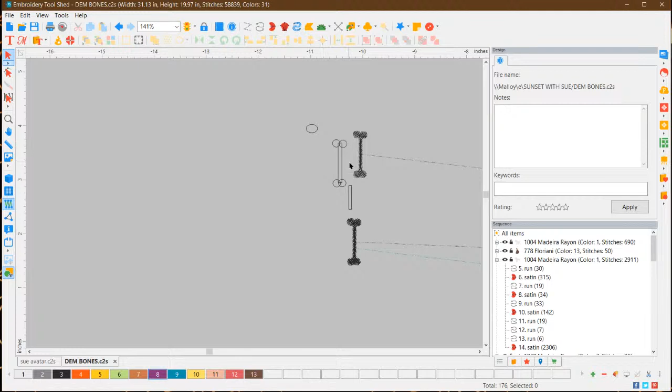And we're still talking about shapes, none of that has changed. We're still talking about shapes. And this is a pretty easy way to make bones. Now, you can make them shorter and smaller. They don't have to be perfect circles, they don't have to be anything. You could make them thicker bones. And then we could stretch out this circle a little bit. This is all that I'm doing here, so this is more of a cartoony bone.

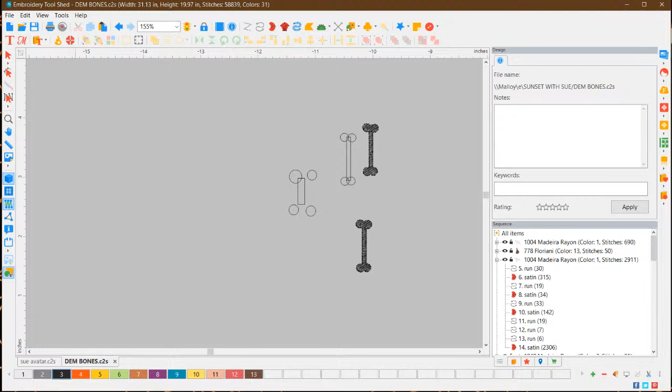So I'm going to duplicate that, so D and pull it out, maybe make it a bit smaller. I think I'll make the first one a bit smaller. And I'm just going to go ahead and place the rest. They do not have to be perfect, we do not need to have perfect bones. But this is all that I did.

Now, of course, I'm going to go in and tweak a little bit. And there, why not, cross them over, overlap them just a little bit, maybe. Yeah, this one's way too big, this is a little arm bone or something. So it's kind of cool this way.

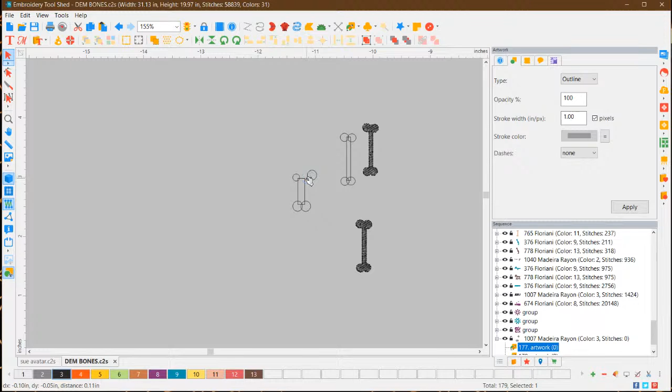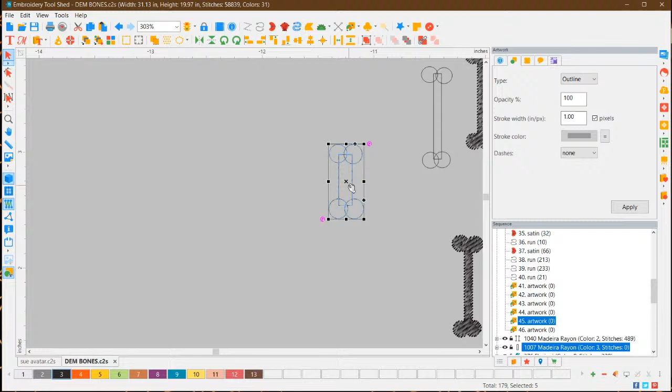Okay, remember that what we have right now is not stitches, we are working in artwork, so we want to put stitches on it. So you can either merge them with stitches or without. And in this software, we right click and we're going to go to shaping and we're going to weld everything together. And look at what we have. We have a nice bone that's completely different from this long bone. And now we can fill it with stitches, so we're going to convert those outlines to complex fill.

And if your software has it set up a little differently, that you don't do artwork when you start yours off, that's fine, just do it all in stitches, that's what we know best anyways. I do not like that, so I'm going to undo and leave it the way it was with an angle.

So bones, everyone's talking about bones. Thread bone connected to the fabric bone connected to the stabilizer bone. Very nice, David, thank you very much.

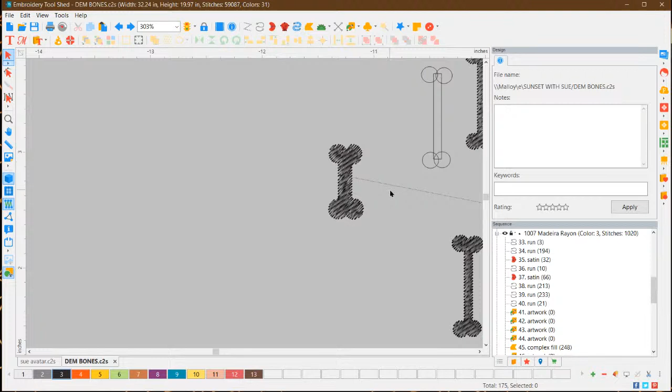That's awesome, but you can do the bones however you want, whatever size you want. You can see, there's a big difference between the thin one. This might be a leg bone, and this might be a neck bone or something. I know they don't look like that, but who cares, right?

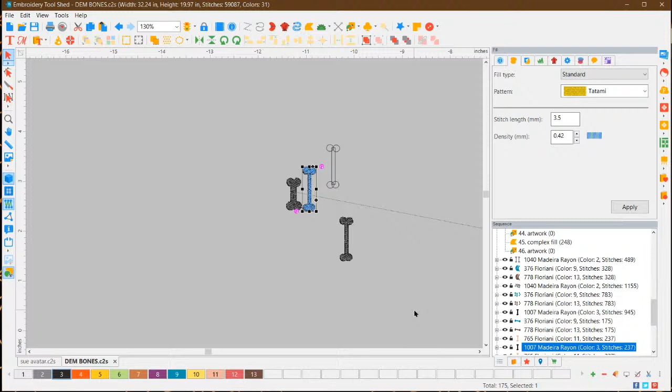So once we have a different set of bones, or one that you like to work with, I think I like this one just a little bit better. It just seems more in proportion, but that's okay. I designed this one to try something cool. So lots of things we can do with it, look at that, make your own lettering.

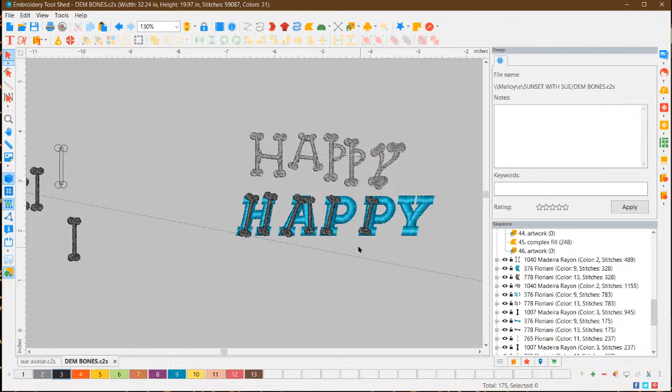And I just did this one freehand because it's easy words. So I just put them together. I made some duplicates here.

Maybe I'll try it with the smaller one. I'll put that one back. Let's try with the one I just made and see what we think. Now I can stretch this out and it doesn't look good, so I'm going to go back on that one. So we might not have enough room for it.

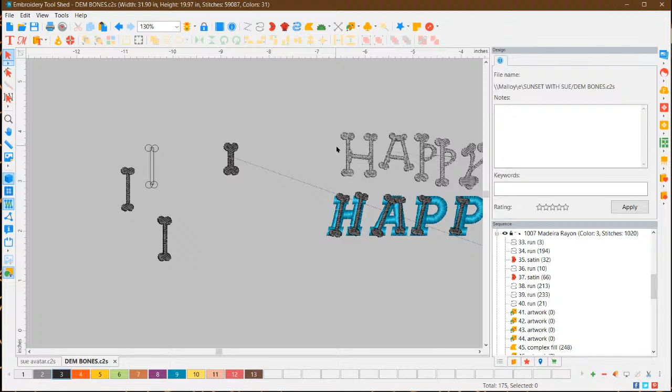So, okay, all you have to do, look, it's all these pieces. So for the H, let's do Control D for duplicate. And whoops, where's my mouse? I lost my mouse, it's hard to see. Okay, I see it. So look, the benefit to doing a duplicate is that you can bring the bone to the size that you want.

Maybe not the angle like I did, but I'm left click and holding, and I'm going to make a little bit of a smaller bone. And then what I'm going to do is copy, Control C, and Control V, and so it'll be the same way. See how I did that? That's a lot easier to me anyways than doing it any other way.

So let's copy and paste, or I guess I can just paste, and it's going to go where I took it from. And for the A, we just want to change the angle of it. And we're gonna, let's do copy, do paste.

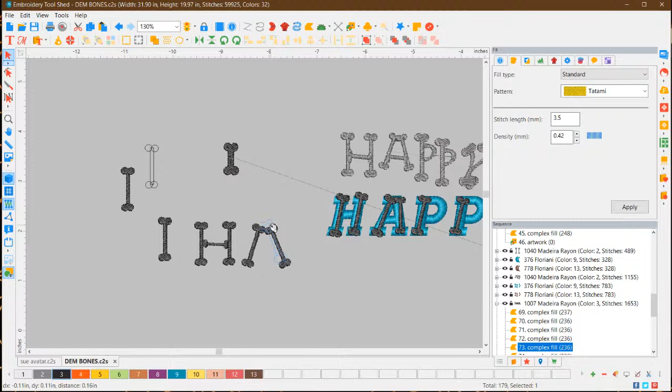So you could create your own alphabets out of letters. And it doesn't have to be perfect. That looks really good. I'm gonna take this from here.

Don't digitize extra stuff if you don't have to. This looks really good. Now that's a pretty stylish letter, and I kind of like it. So it doesn't matter that this is shorter. Look, this A is smaller and it looks pretty good.

And you know what? I just bent the bones around, and let me show you how I did the Y. It's kind of looks like it's merged. We could probably do it a bit better, but it'll still give you the idea of what I'm doing. That looks more like an X, so that's why I did it that way. But it's easy to do.

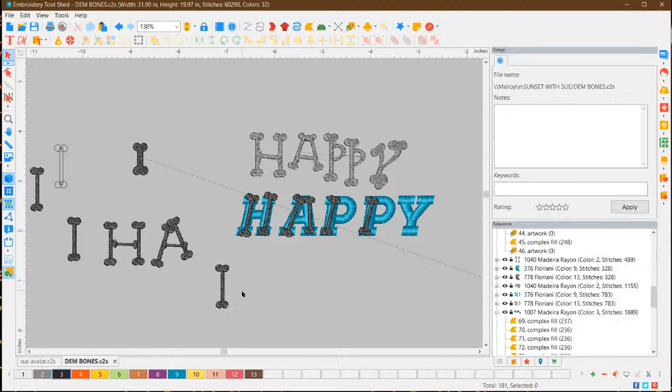Let's go to copy and paste, and there we go. And we're going to go into node mode, edit nodes, sort of thing. I'm going to zoom in so you guys can see it better.

And what we're going to do, I'm going to leave the angle there, but I'm going to add a couple of points. And this is how we're going to make the letters sort of thing, we're going to make it work. The easiest way to do it, I just put a point there and a point there, and they're curved points.

I'm going to left click and drag and create a bounding box over both. And once you do that, then you can do this. And we can play with our Bezier points here. I don't think that's right.

Let's smooth, so I can have another Bezier point. Smooth. So, I mean, that's a start. You can also move these down if you think it's like too harsh sort of thing. You can move it down like this instead of it being up here. Do you see the difference?

A little bit of playing involved here, but let's do it like this maybe. Try to get it in the middle. I don't know what this is, but you know, there we go. But see how you can do that? That was super easy, 2 points, select both of them.

Node mode is reshape. Yeah, I'm sorry, I tried to say that. Or edit. Isn't it edit nodes in some software?

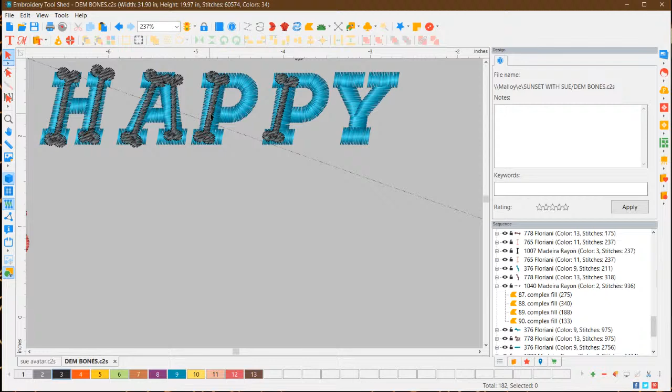Now on purpose, I made the designs a bit shorter, a bit longer, a bit moving around. It seems to work just fine, and I put another one here for the P with the curve, or you can design it yourself like I did with the O. But why not make your own bone lettering? I think this would look spectacular on just about anything, and it's one of a kind original.

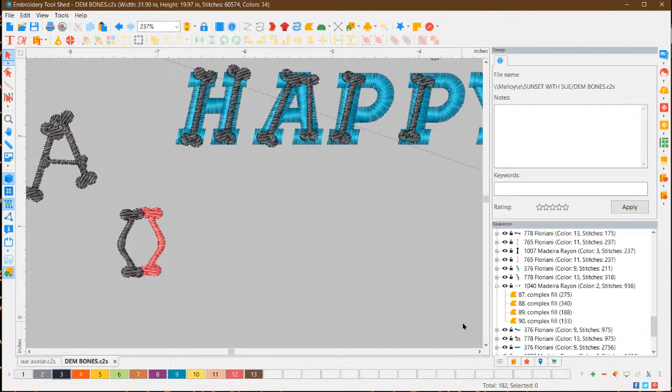You can make a bone as well, but your bone will be different from mine, so it is completely original to you. And it's actually a lot of fun. You could do duplicate and just put a whole bunch down and then move them around - that might be easy. But pick a font, pick the size of the font that works, and just lay some bones over it. Then you delete the lettering or move the lettering, and that does not look like anything because I haven't finished it yet. But that's an easy way to - remember, I'm always saying work with what you've got, and you have fonts in any software.

Let's really have some fun with this. So what I did - and again, as always, I'm not encouraging you guys to copy anyone's designs, but if you're just making something, why not use it as a template? So this is just a dog design, and it comes with Perfect Embroidery Professional, but you could use any design or shape. It just helps you figure out where to place the bones, and you don't have to be anatomically correct about it.

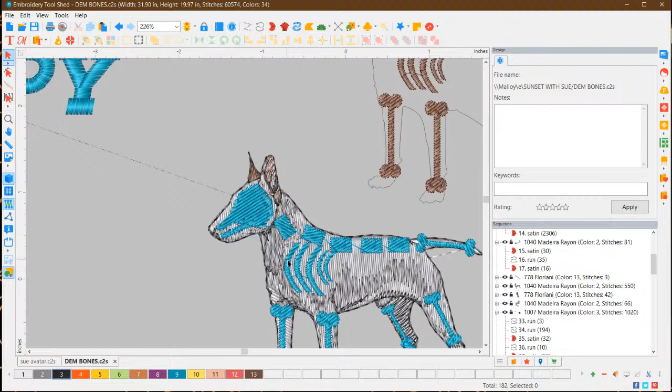Like, for example, I know that the bones of the spine do not look like that. I'm aware these are kind of funny looking ribs. I think I would actually like the ribs to be in satin stitches. But anyway, I just took a straight line and put a little bend in it. Then for the skull, depending on the size, you can get detailed about it. But look, I just made a rough outline, and that is probably not the greatest placement.

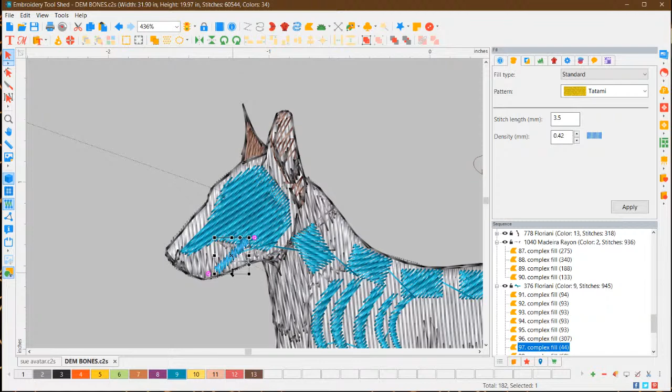You could put teeth in there too if you wanted. Make it all one piece - it doesn't have to be anything too particular, but you get the idea of it, right? You really get the idea of it. Even if you just leave it like this, you still know that it's a skeleton dog.

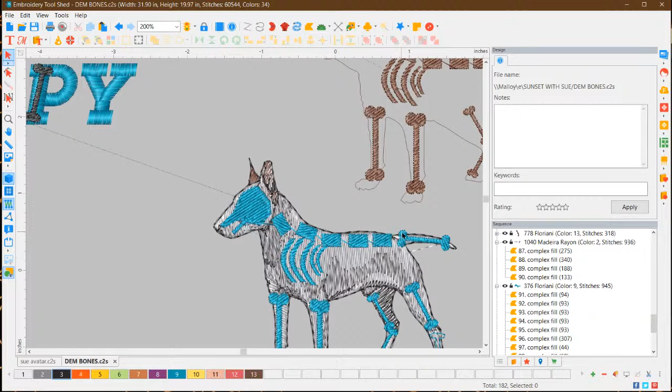Why not? So these are just rectangles, and again, you don't even have to be even remotely accurate on it. I mean, a hip bone and shoulder bones - they're different shapes, you could figure out what they look like. Probably not at this angle. That might be difficult.

Or what you can do is select the whole dog design and create an outline for it. So right click, create outline, and then move all of your pieces in. So then you don't have the background. Sam came down and she looked and she said, wow, I love that. I love it with the shading behind it.

So all you have to remember is this: the dog, the shape of the dog, and everything about it other than the bones is not your design. So you can't do something like this and then sell it, because the design still belongs to Dime. So just be aware of that.

I think this is really cute. I thought of like a kitty cat sitting there, different things. You could even do a person and make a skeleton out of something like that, and I think they look good. I would fiddle around with my skull bone. And you know what, you could even be really, really funny and do something like this.

Copy and paste, make a mess of my lines there. Why not make it a little smaller and make his ears like that? It doesn't really matter, I think it would look really cute. I'd have to resize that a little bit, but isn't that cute? Let's do another paste, because why not. It's a dog-ish, skeleton-ish, and everyone will know what the idea is. I think that's cute, it looks more like a bug right now, but I don't like the skull. I just whipped it off and then got tired of it, so fiddle around with it. But ribs don't have to be realistic.

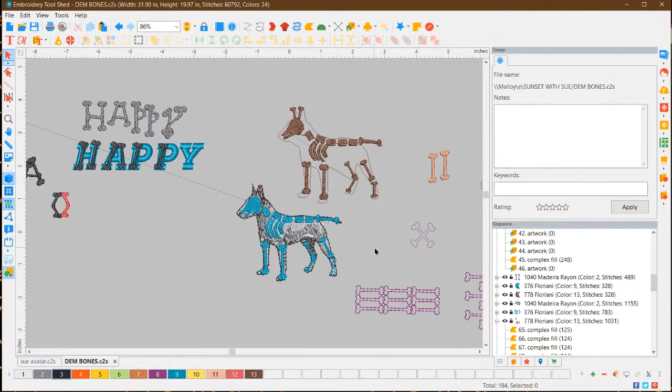So now we can do more things with bones. I had a little bit of fun playing with them as motifs, and I thought, oh yeah, of course. I'll show you that big one in a minute, because this is a classic. Why can't this be a motif for sure?

So how did I do it? I took the bones that I made, still the same bone right from the beginning, and I made a copy of it and pasted it. Then I went ahead and right-clicked, and we're going to - you could either convert to run, that's one way of doing it, or you could create an outline. That is just as easy. Now that doesn't show up very well, so let's make it a little darker.

So all I did was put an angle on it, and then I'm going to copy and paste, copy and paste, because we don't want to have to do that again. And then there we go, and that looks really good. Now my only problem is the difference between this one and this one is, first of all, jump stitches. Why? Because it does one bone and then the other. I would like it in one piece - it's going to make it stitch out even better. And that's what we want to do.

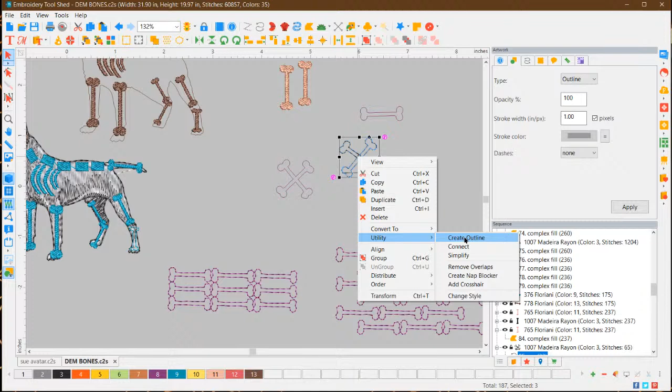So you can always create an outline. I have both selected, and it's going to create an outline, and then you see it's done. So you don't have to weld, you don't have to do anything fancy - just put your things together and design. It's another way of doing it, and I think it's really handy. Now we know we have one in and one out - it is one piece and it would stitch beautifully. So to create our motif, we have to remember our in and out points. It doesn't have to be perfectly level, you can do it a little crooked if you want.

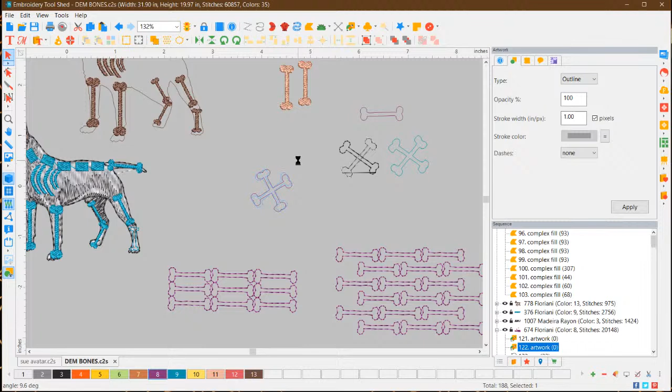I don't want it to look like a cross, but of course you can just change everything that you want to do. And I'm going to pull out a guideline here because I want to make sure.

Group or merge in PE Design 11. Group doesn't put them together, group just keeps them together. So if I were to group these two bones, they're still separate objects, but if I clicked on one, they would move together as a group.

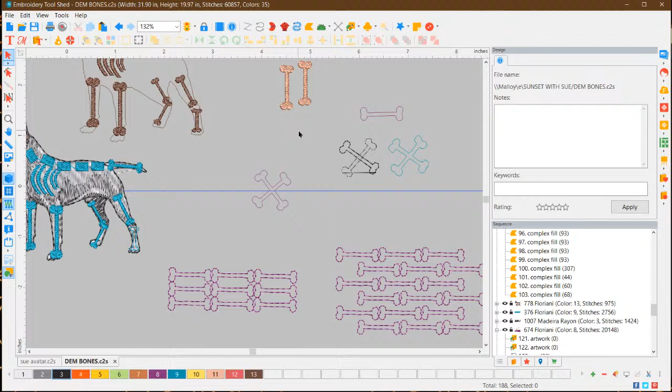So merge, yes, I'll have to look. I don't use it that detailed enough to remember offhand. But if you can't find merge, the whole idea of that exercise was that you can do outline. You can use what's available to you.

They look like Jack's the Game. Well, they're scary, scary bones. It's not Jack's the Game. Yeah, they kind of do.

So what we want to find here is our start and end points. And we want to, whoops, we don't want to do that. Although you can if you want to tweak it. Let's move in here and see where we are at. Oh, do you see what my problem is?

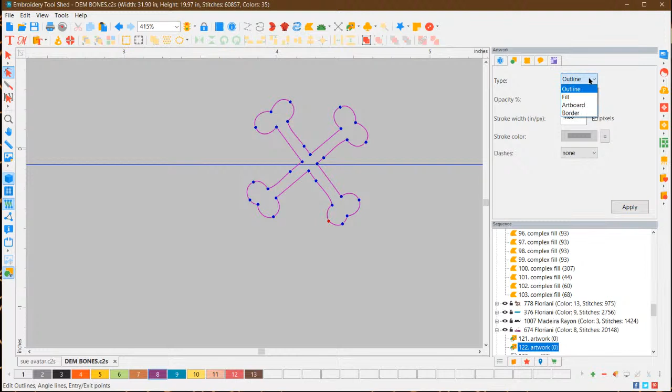Okay, so I'm looking for the start and end points. I did an outline, and you know what, there's no stitches. So what do we have to do? We have to make stitches. There's no start and stop points in an outline, in a graphic. So there you go, let's convert it to run.

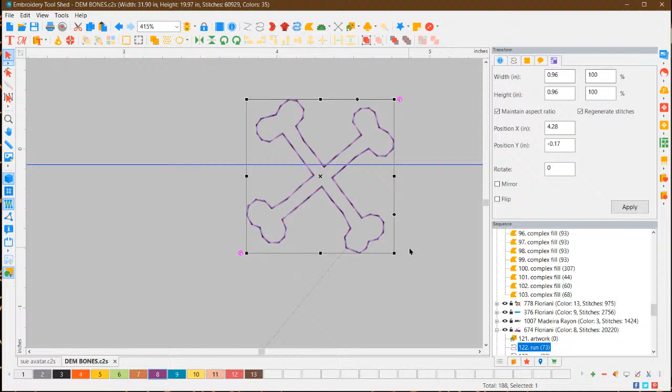There, now that's better. Now this looks a little jagged because it's pretty small, so there's not a whole lot you can do about it. Yeah, it's not even an inch by an inch. How about we make it a little bit bigger than that? Now the bigger you make it, you notice these are rounding out more. Why? Because they can get more stitch points in. And that's why you have to be careful when you make things smaller.

Now for this one, you could adjust the stitch length a little bit, but it won't make any difference. So now we can go in and change the start and stop points. So my point of all that was, if it's not working the way that you want, think about it. I totally forgot that I need to convert it. So it just will help you get

Not get frustrated. So what did I do here? Well, this is our start and our stop point. I think I'll change my mind last minute, and I'm going to put it here, and I'm going to put it here. No. How is that going to go? Let me try this and see. I like to try different things.

Need a skull on top of that. Yes, I know, but I'm going to have to figure out how to do skulls from shapes, and then we can put it together and make something super scary. I think I got it backwards here.

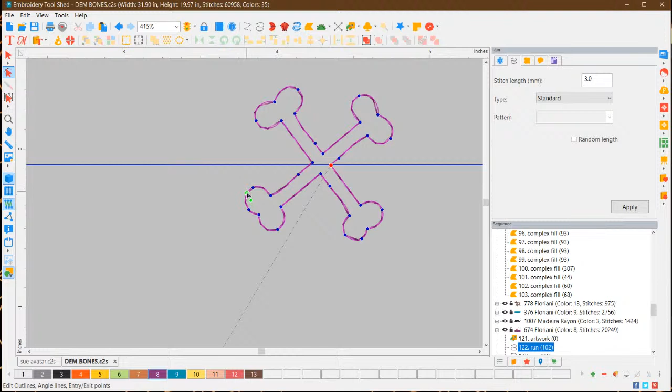Sometimes when you're making motifs, be patient and remember to figure things out. Take your time, remember what you need to do.

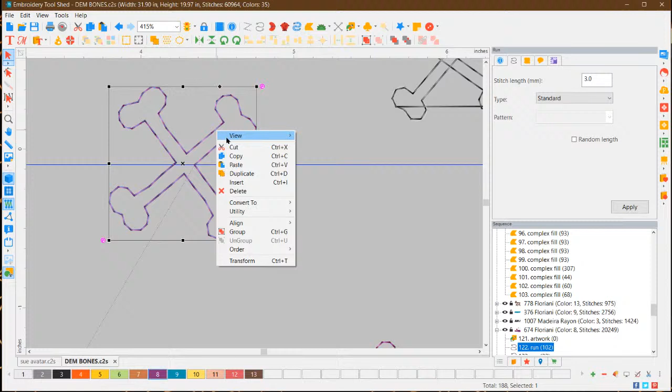So this one, if we were to, let's do it the way it is. So copy and paste. If we were to do it the way it was, you see a jump stitch pointed out there. There's my stop point, and there's my start point, and there's no jump stitch. So what do we need to do? We need to make a little bit of space in between these.

So I'm going to go back to that. Now this is my stop point, so I am going to grab right here the run path, and we could do a round swirly. We could do it like this, maybe that. I should have marked how far away it should have been, but I didn't.

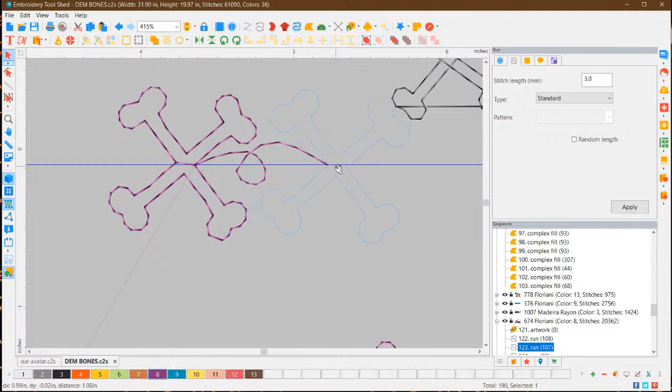Oh, we do definitely need to change that color to match our bones, which is purple, because why not? Then let's do a paste of the bones, and let's move it over here and line it up where it's going to start. And I think that's the perfect amount of space in between. I kind of like it.

You could do a line, you could do, I don't know, a smiley face. You could do anything that you wanted in between. I think the swirly is cool. Another thing you could do is move them down a little bit, and you don't have to just have one design. So again, I'm going into node mode, edit mode, and I'm just moving it around a little bit.

I don't want it to cross over too much. I'm just playing at this point. They don't have to be equal, they don't have to be anything like that. Let's move this to smooth, and then we can use our Bezier curves to get the look that I want.

Let's connect. Now, how does that look? Oh, make sure you move your stop point. That kind of looks like maybe a bee was buzzing around or something.

I don't know, maybe it needs a bat or something in the middle. Would it work to set it askew and have a stitch or two connecting the cap ends of the bones? You could do that, yep, you could do that. You don't even have to do, whoops, wrong, I need this. You could do something like this, and you could do the start and stop points right there.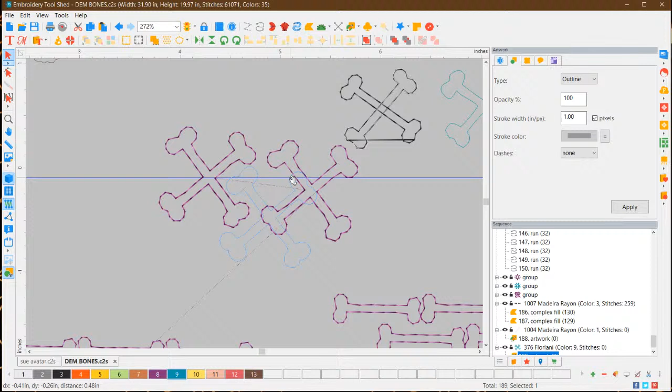For example, we could get rid of this, and we could even do something like this. How about that? Okay, there's a jump stitch, so let's fix that.

I always delete it because you might get confused. So what we want to do is the start should go there and there. Or you could do a straight running stitch. You don't have to be, I'm getting ahead of myself here. We don't have to have it fancy.

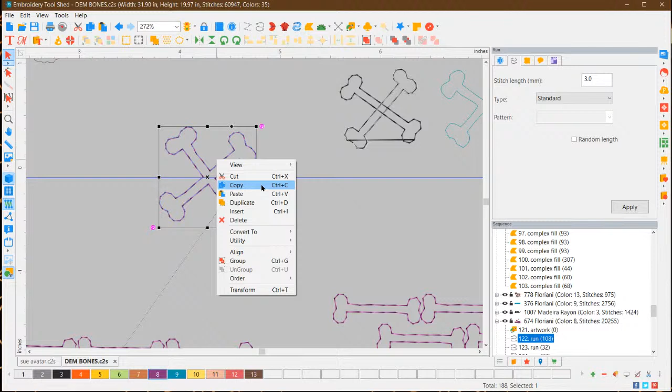So if you wanted it like this, and what I always do, if you don't want to mess with the points, there would just be a little jump. Maybe it would be best hooking up there. We could figure that out.

Or we can pick right here. Now, is it optimize sequence? No, optimize entry and exit. And there we go, and we do not have to worry about it. So that's what this one would look like.

Sometimes I like to do a copy and a paste and then move it over, and it's going to be equal to that. Isn't that cool? This is what it's going to look like, probably up a bit higher. Isn't that neat? Needs to go up.

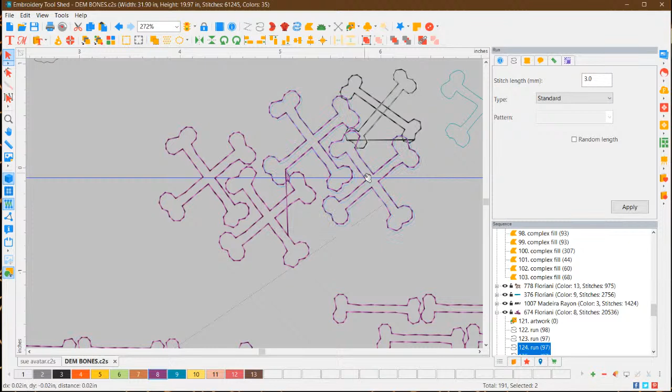Ha! I actually really like this. I think that's cool, I think that's a lot of fun. So many things you guys can do. I could sit and play forever with these motif stitches.

So do one with them close, you could do one like this. And what I would do here, using the tools that we have, I would line up their bottom areas there, and then set the close start and stop points.

I mean, you don't have to go into node mode every time. You could do it, you could do just one, you could do just two. You can, you know, do one below. You could do 3 or 4 of them, as long as the next set will connect.

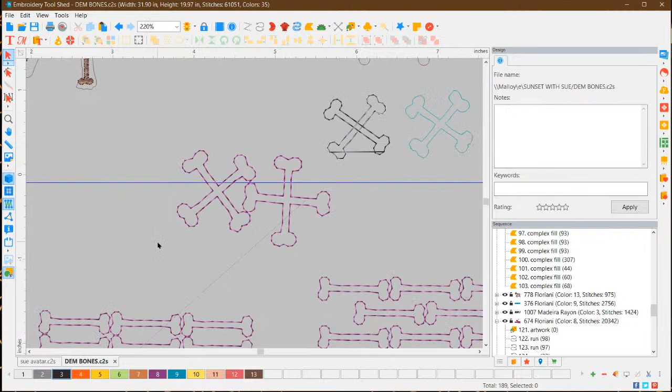You put it on a new page and try it out to see if you made any mistakes. You don't have to just do motifs or scary dogs or anything like that. We can do more with this.

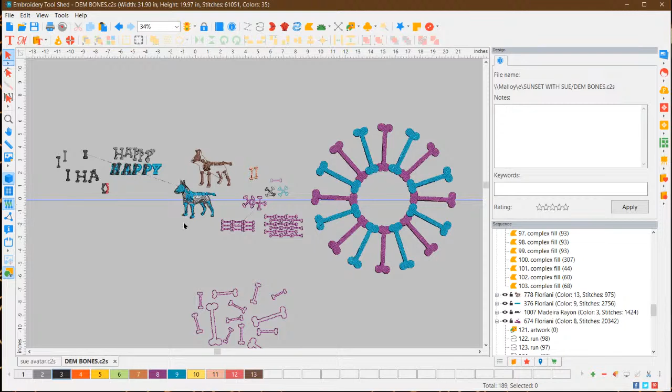I'm going to show it to you, then show you how I did it. You may or may not have noticed this in the title pages, but now you can see exactly what it is. It's just bones in a circle, and it kind of looks like an eyeball, so you could do something like that, still using the exact same bone I started off with.

So then you could use these ones here - not aligning, duplicate, repeat, and carousel. I had a lot of fun with that.

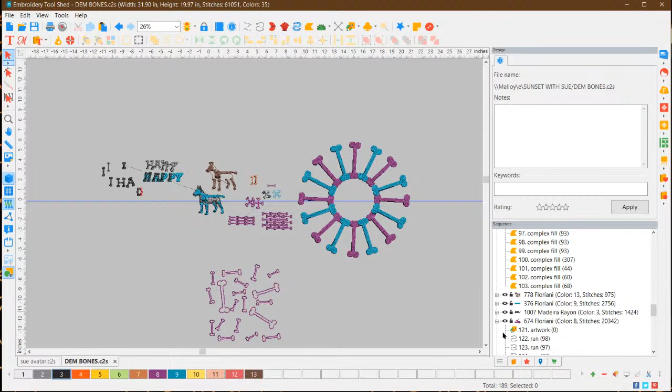Look at this one, the bones in scatter. Isn't that fun? Bullseye bone, yeah, why not?

You could put a swirl in the middle of it. You could make kind of a strange, funny, weird, whatever Halloween design out of this and put a swirl in the middle. It doesn't have to mean anything, and then do a couple more of them.

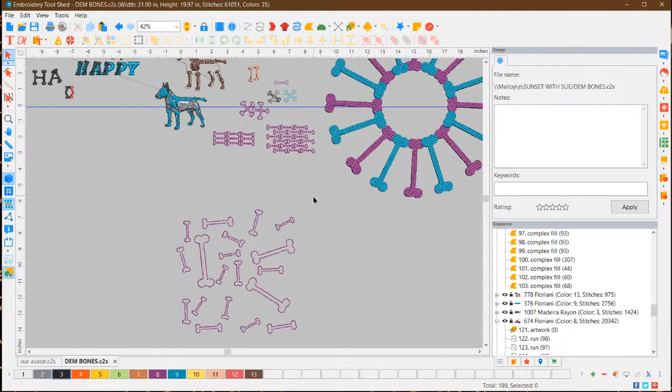I'll show you if I place one beside it - it looks really cool. This reminds me of the coffin candy with all the bones where you make a skeleton. I don't remember that, but that sounds fascinating. I'm sure I would like it even today.

But look at the scatter ones, isn't that cool? All I did was change a few settings on this, because I know this is a running stitch, so we can make it smaller than the basic ones. So let's do the scatter first.

You could also do it with your crossbones if you have a skull. So let's pick this guy, and I'm going to change the color so we can see our new stuff.

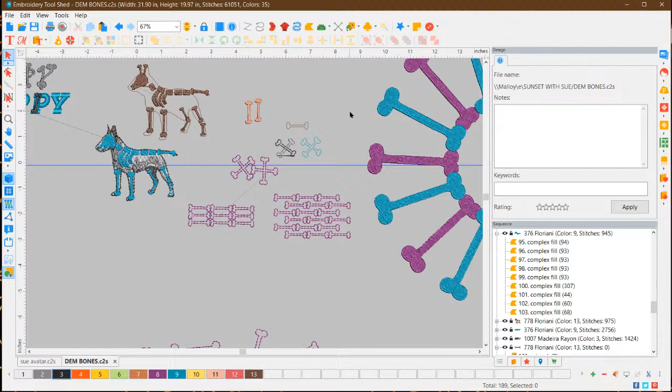Something like lime green - oh, that does not show up very well, does it? How about we go back to brown? There we go, that's fine. I need to zoom in a little bit.

So I'm going to select it, then go up here so we can play with it. How about repeat? This is the first one, I just left it like that. Number across, let's see, 4. Number down, 3. Let's apply.

Number down - how about we do 4 down? Then we can play with different things, like distance between centers. I like that.

If you had more than one color, you wouldn't want to do that. The scatter skull with applique is an idea for Sue to create, and it's on the list. There are so many things you can do once you get started working with the shapes, like creating a bone fence.

That's actually what it looks like. You could change it to be horizontal easily enough. You could make a motif stitch that would make a bone fence for your haunted house.

Fantastic, I love to hear it. Now for this particular design, it doesn't really make a difference if you mirror or flip, but you can if you want. See, that would almost make doorways - you could make a bone house.

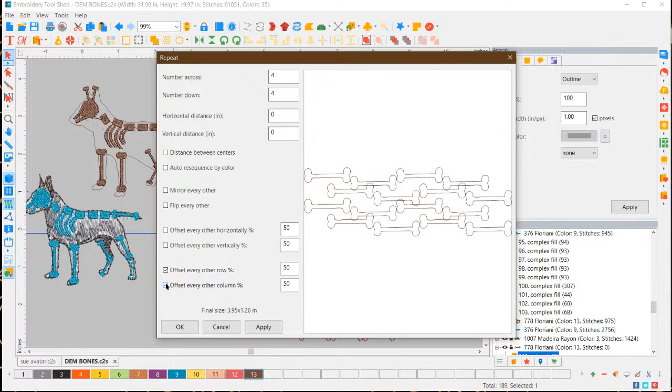This looks like the beginning of it, so it's just an offset. I like that one too - offset every other row by 50%. For some reason I really like that. Offset every other - yeah, I didn't like that because they crossed over.

So let's do this one. I thought, okay, that is different again from this one.

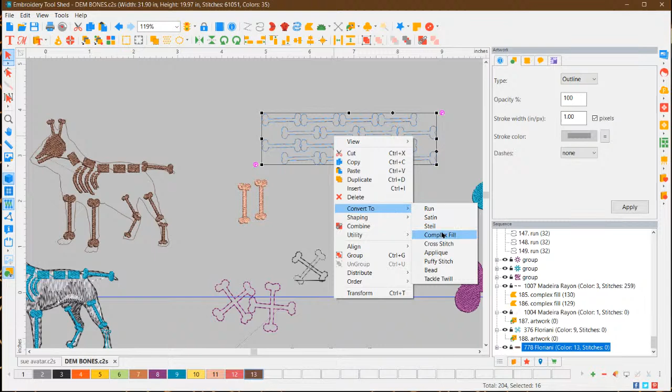I thought, you know what, if you wanted to make it more interesting, what you could do is select the whole thing and convert this to complex fill. Then I just picked some of them, either in a pattern or random or whatever you want, and changed the colors.

So we could think real Halloween colors - let's throw a purple in there, and we need a lime green. I didn't mean to do that one the same, yellow. But doesn't that change the whole look of everything? I thought it was just fantastic.

Let's make it a little bit bigger. I just thought it was awesome - like, you could even do it as the bottom of something, continuous embroidery.

Shannon says this looks like the area my grandpa used to hold his horses. Almost, yeah, it could be anything. Well, you could do a skeleton horse in his paddock there. I think that would be kind of cool too.

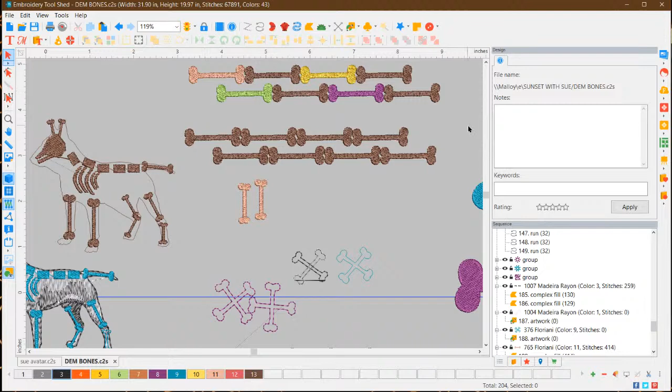You could make a decorative frame out of this, like a bones border for a name. Now that we have it done, you could select maybe two rows of it and move it up, and you could write someone's name. So a split design, there's so much you could do. You could do that with the bones in the circle too. So this is where you get to play.

Now I'm curious, I want to take this one and do the repeat. Oh yeah, jump stitches, but we can fix that after. That's actually really cool, no that's fine. Oh, I don't have any colors. Mirror every other - it's not, but, oh, I like that even better. So I mirrored it, and that'll make nice connections. We still have the run here, but we can fix that. I like it.

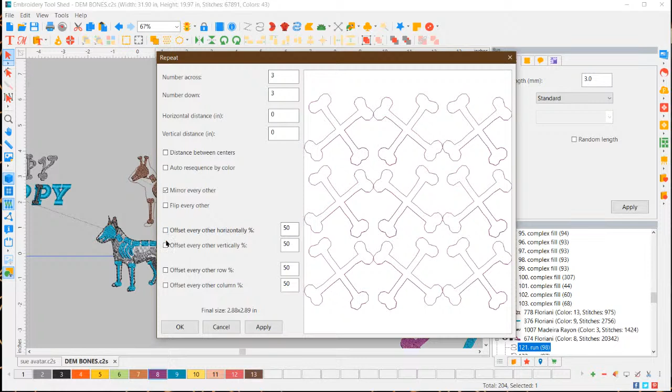Cool, offset. I try every one because you never know. That's actually cool too, and that's kind of random. I really like that because it tilted them. So isn't that neat? So let's do apply and OK.

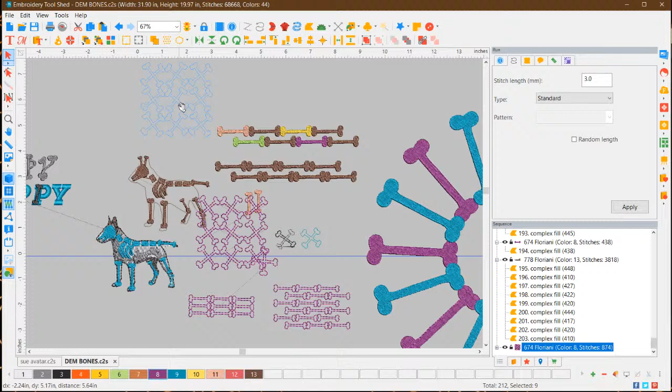And that is certainly a fast and easy way to make a design, isn't it? Complex fill, yeah, isn't that cute? I really like that. Let me see how big it is. So it's 3 by 3, so that is really cute.

Make it more Halloweeny. Lila, thank you very much. And the jump stitches are gone. It's a pretty clever program that it will do that.

So I'm going to make it some Halloweenish colors - purple, turquoise, green. I don't really have too many more. Let's do that one purple, let's do that one turquoise. How cute is that? I really like it. That was just accidental fun.

And that is the reason why I try all those boxes. I try everything I see because you never know what's going to happen.

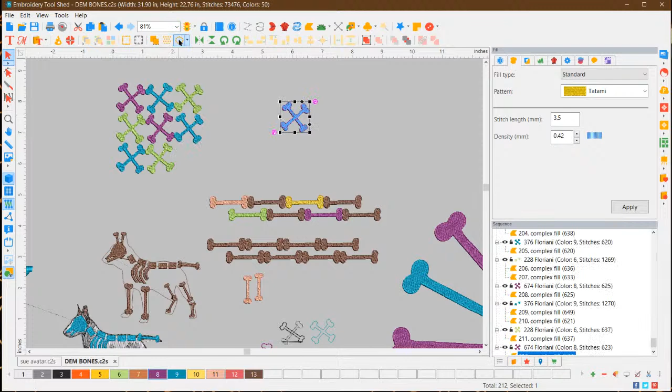Now let's try these ones with the crossbones. See, now that looks like a Jack's game, I think. So we're going to do the circle one.

So repeats, angle, scale, we can make them bigger. Auto rotate, bring them in, bring them in. See, I don't like that quite as much, but maybe you could put a skull in the middle and make it like a wreath. Tic-tac-toe, now wouldn't that be fun? I think that would be fun. You could use the O I made at the beginning for it.

So again, there's no magic numbers. I just held it down until I got it to be what I wanted. So that's okay, we could have fun with that, especially if you had more than one color on it. Let's hit OK. So yeah, that's okay. Shall we try another one?

I'm kind of liking it. I'm kind of stealing from this design, but that's okay. I'll move it over here. And I'm going to click the little arrow here and scatter. Oh, I bet you scatter's good.

Let's try place. Now this is pretty handy if you want to - you could make this, bring them in closer together. There's a whole bunch like scoop and t-shirt. It would make easy breezy work for different things.

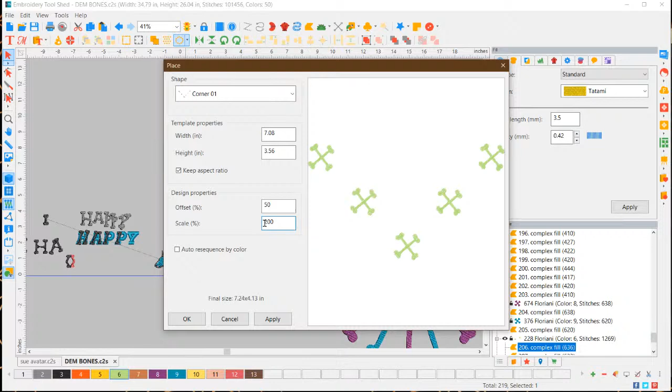You could make a box frame out of the crossbones. Yeah, you sure could, just by doing it on the corner. And offset, design, scale - we could make it, let's make them bigger and see. No, apply, sorry, there we go. So I just doubled it. Let's do it, because I think that's cool. Very cool. And let me check the size.

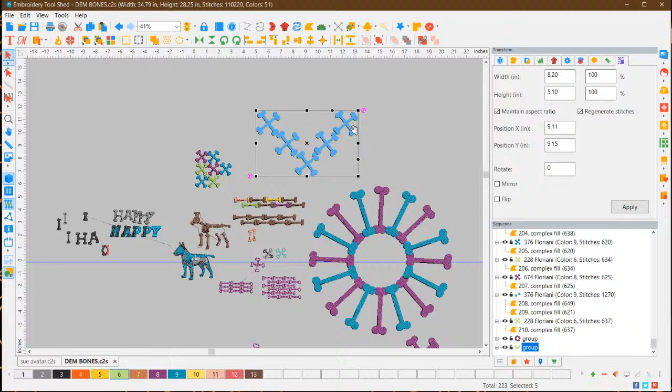I always check the size because I have huge stuff. So it's 8 by 5, so we are going to make that a bit smaller. We don't have any fancy stitches or anything, but look at this, yeah you could. Let's move in there a little bit. And it's all set up for you so you don't have to place anything at all.

You could do the outlines as well. So let's copy and let's paste. A lot of things happen when you just try something, you never know. I flipped it the wrong way, but that's okay, and it doesn't have to be perfect.

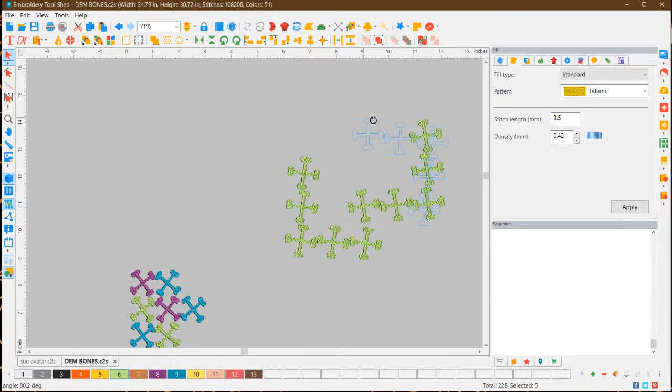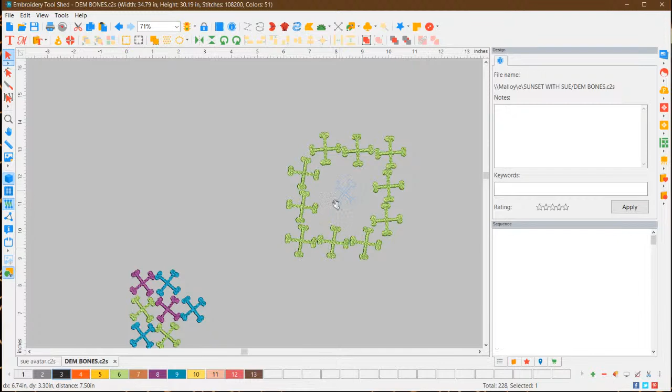It can be on a slant, you don't have to match them perfectly—you could, because it's bones. So you can do whatever you want with bones. Look at that, yep, you could do that. I kind of like that. You could put maybe a skull or some writing in the middle. That's cool ideas. You could make like a diamond out of it, alphabet letters—lots you can do with it.

So repeats, let's do 3. No magic numbers, just figure it out. Okay, how's that for a cool pattern? Wow, just like that, I love it. It looks like Halloween argyle. Yeah, love it, I'm really loving that.

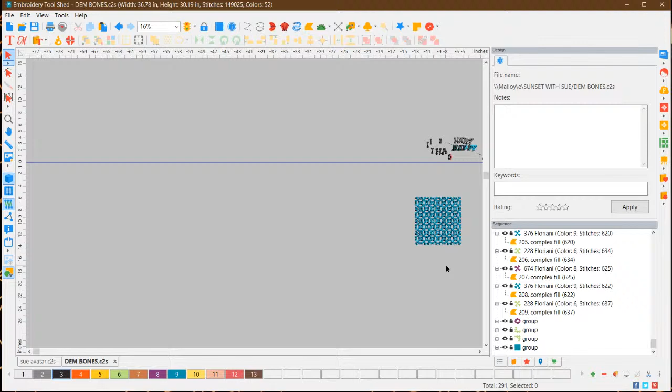Let's zoom in a little bit over here. How cool is that? Sorry, I got too click happy there—way too click happy, where'd we go? There we go, I got too click happy. So look at this design we just made. Now how big is it? I always check—7 by 7, so 8 by 8.

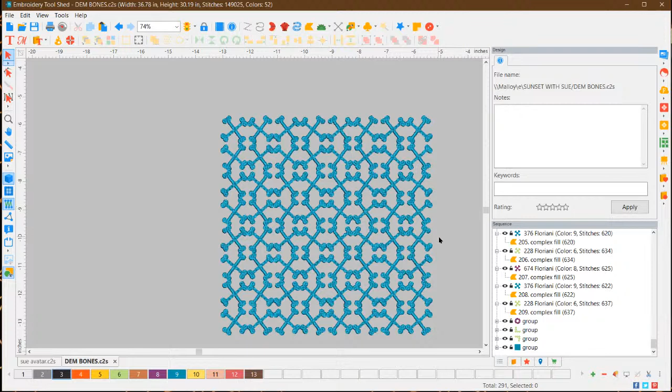That says a quilt square to me. So that is a fantastic design. And you know what, you could go through and change some of the colors. See, now they're all grouped together—you could ungroup it. But looking at that, what do you guys see first? I don't see the X's, I see these diamonds with this in the middle. Yeah, see, that was the coolest thing ever. How about we try that again?

How about let's try it in purple? And we went to, no, cancel. 3D—that would be a wicked accent block in a Halloween quilt. That's exactly what I'm thinking. You see circles, kind of different shapes of circles, big ones, small ones, kind of like an argyle design, but in bones. How creative is that, guys?

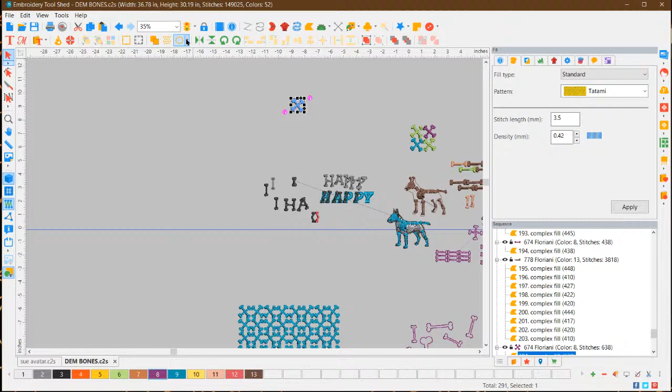That's it, I'm just amazed. I love it, I love to play with it. So I picked 3, let's try 2 and apply. That's basically the same thing, just smaller. But let's make some other adjustments—let's change the angle to 10 and click apply. See, that makes a bit of a difference, but it looks like we're missing something in the middle. So I'm not really sure if I like that.

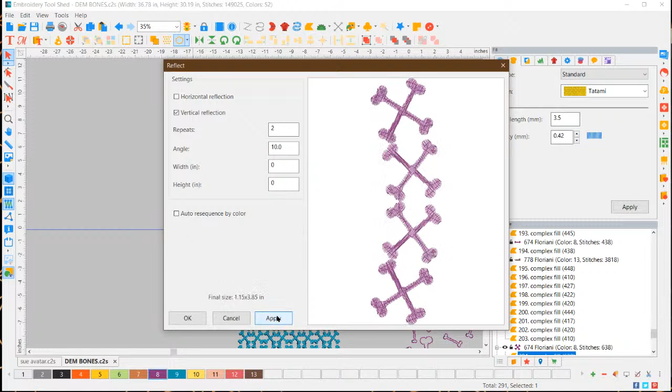Oh, and you can set the size. So let's take off 1. Oh, okay, that's how that works. That's neat, let's take that off. Okay, I like that, so if you put both of them on, it's better. And I wonder if there's a really good number for that—that changes it a little bit, but not much, I think it's just as fine at 0. I'll have to sit and play around with that, but I really like that a whole lot.

I think, so final size is 4 by 4. So you could do that. I see argyle, but I love argyle—that's kind of what I'm seeing.

Robin, try negative—ah, let's do that, I didn't think of that. Good thinking, so let's do 25, maybe? Negative? Bah! Wow, great idea. I have no idea what that is, but I love it. Oh yeah, great idea, thank you Robin. Brilliant, so that is how you change it anymore.

Let's start off with my original number. Yeah, no, 25—so maybe let's try 50. Again, no magic number, and as Robin suggested, make it negative. And that's exactly what I wanted—now that is a quilt block that you can be proud of.

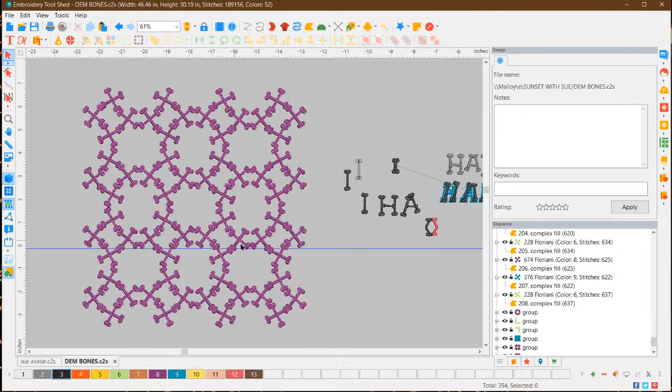What about if you did it as a continuous border with just 2 of them? Continuous border across the bottom. If you left off a nice border, yeah, yep, that's exactly what I'm doing. You could put skulls in each of the spaces for sure. You could put something like this.

To me, this could also be a really original, one-of-a-kind monogram with 3 letters in it, because this circle part here kind of looks like the main one. So you could put initials in it. You could put a skull. You could put a bat, a sideways bat, and the bat going this way, and then maybe an initial. I mean, I think it's incredible. And that is just from 4 circles and a rectangle.

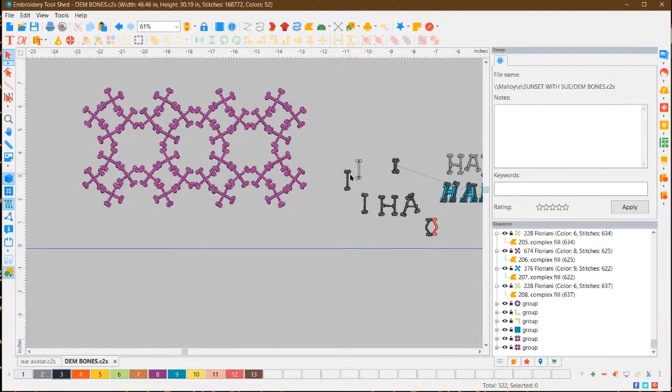And this, you know what, if you move back like that, I see snowflakes almost. And that might be a very, oh yeah, boo, each letter in the middle. Yeah, wow. All right, I think I might do that and see if we can't.

I'll put it in the group and people can stitch it out. This is our creation, so on the fly is the best way to go. That was so much fun. Thanks to Robin's suggestion there, because that was awesome.

Yes, eyes on a skull. See, now look at this one, Misha. Look at this one down at the bottom, the turquoise one. That does look like Argyle. So we could call it Bone Argyle. That's what that would be. It does when you move it away.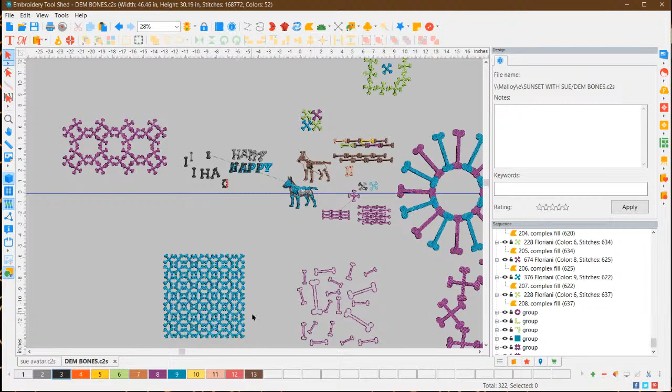Now imagine it with a different color behind, because gray is kind of yucky. So I'm going to do this like this, and I'm just making a rectangle, and then I'm going to convert it. I just really, really want to see complex fill, and that's going to cover over it, of course. So all we have to do is just change the order of it, right? We're going to move the purple, move it even up here, should be enough.

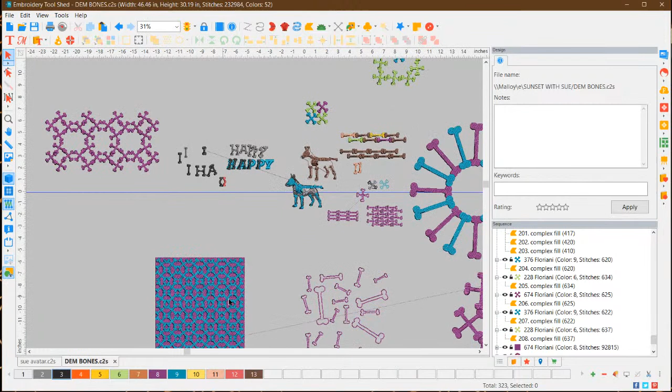Yeah, what do you think of that now, Nisha? What do you think of that? Awesome. If we could make it in 2 colors, I'm pretty sure you can, because it had color sorting on it. So adding a different color background really makes it. What could we do? Maybe green instead of the purple. Let's do the green.

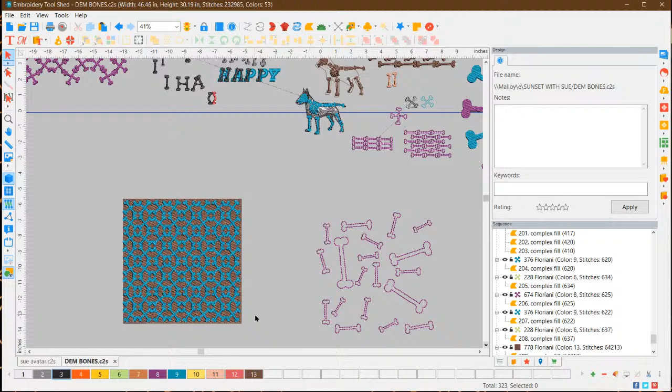Wow, wow, I love that. I love it. Play around with colors. That is cool, that is really cool. So I'm hoping to see some bone quilt squares, and play around with it, and I'm pretty sure, you guys, that we can do more than one color.

Now, this was one piece, so orange and black. Yes, I think orange and... I'm going to have to try it now. I'm going to have to try it. So, is it this one? No, I have so many things here. It's sometimes hard to find it.

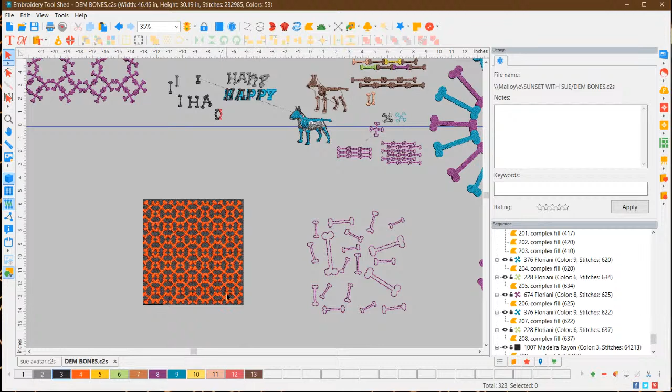So let's do orange at the front. Oh yeah, oh yeah, black at the back. There you go. Did it change to black? Yes, it did. Sorry, I don't know why that looked weird. You know, you could even put a background on this part too and remove overlaps and clear it out. So, yeah, that's pretty clever.

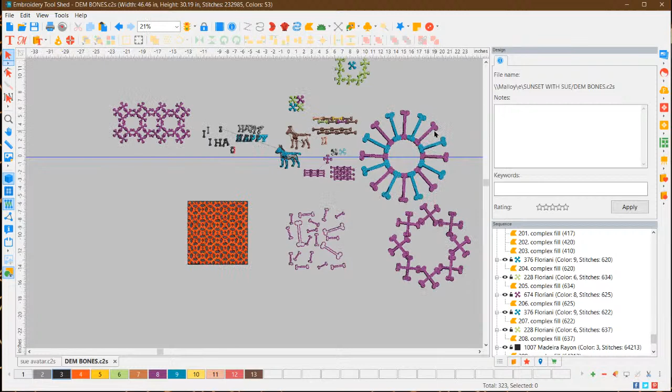Okay, one more thing, ladies, and then we shall call it a day. I just want to try the theory. Here we go. So I had to find my bones there. So we've got 2 bones. I'm going to zoom right in so we can see. So this is just kind of an experiment, and I want to see how well it'll turn out.

So I'm going to tilt that bone and put it black. And I'm going to take this bone, and I'm not going to merge them, because I want them to be 2 colors. Let's see how it works and see how good the connections are. I'm just curious, I haven't tried it yet.

I've thought about it a couple times. Just designed a fabric I would definitely have to buy. I know, right? I've got to think of something fun to do with it.

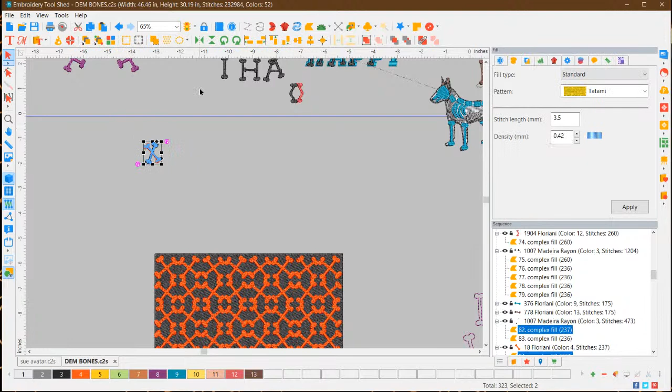So there's our X. Let's go in here, it was reflect, angle -25, apply. Oh, we need more repeats, 4. Auto resequence by color. Okay, how cool is that?

I think that looks even better. It almost looks like a secret message or something. Isn't that cool? Repeats 3. How about 2?

We tried 2 before. Well, I think that's neat. How about 4? Just to try. Yeah, it gets... I think I like 2. I think I like 2.

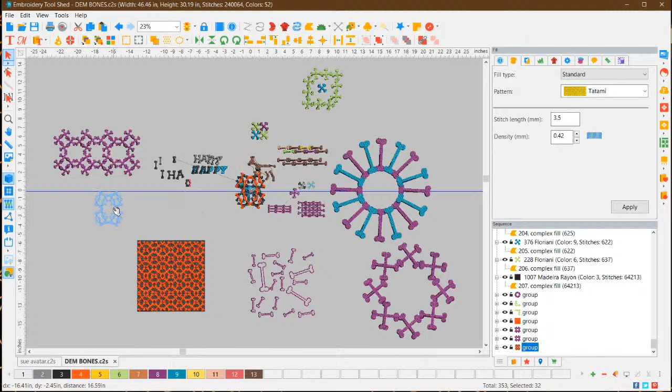I really like that. So how many designs did we create in this? A lot, I'm going to say. Now this is similar to this one, how it turned out, but different as well, because why? Because I started off with a different image. I used the same bones, but they were crossed differently. And look, it looks like the black are in the background with the orange over top like that.

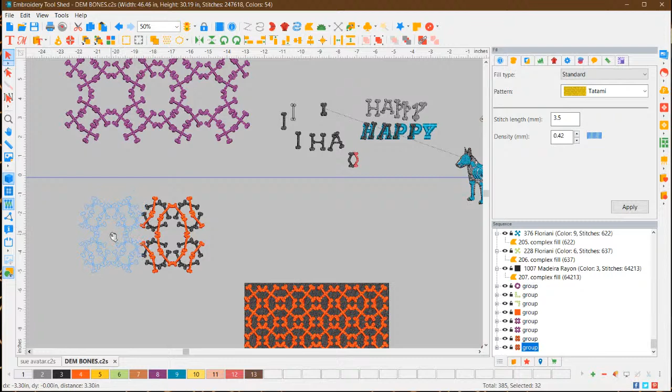So let's do a copy and a paste, move it over and line it up. And of course they're all grouped, so we could make that a little bit better, or I could select both of them and use the tools I've got, and now they're perfectly lined up. I think that's spectacular, it's almost like bone lace.

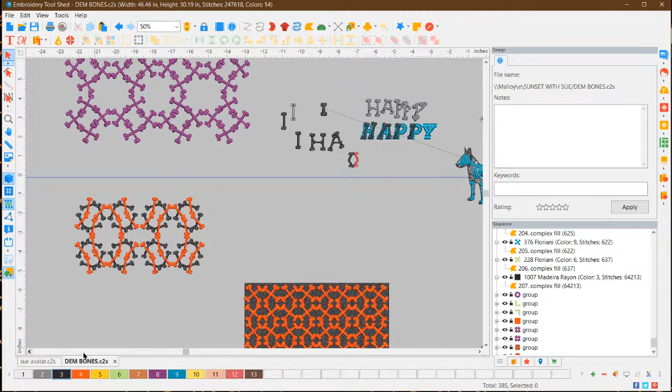That would be cool. I've been watching, but I had a phone call that kept me from chatting. So hi everyone, thanks Sharon. Well, we have had a party with this, and I really do think this is cool.

So group, and is it color sorted? I just want to check that. It sure did color sort. You know what, you could delete the orange or delete the black, and those are pretty cool designs as well. You could move them. So it's all color sorted, so it does work. I really like these for sure.

I think this was the most fun we've had playing with this. Look at that, one design, 4 circles and 1 rectangle. I tell you, people who are missing these classes are missing out on stuff. Everyone should know how to do this, because it's super, super creative. So one bone, and look at all we did.

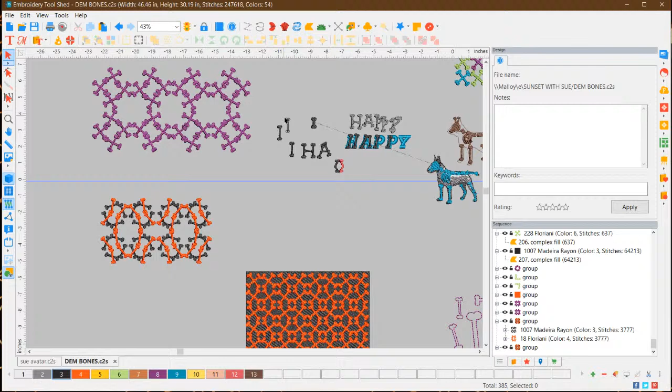I'm going to zoom way out. Look at all we did with it. Look at all the designs. Little designs, big designs, fun designs, playing games, scattering fabric. These patterns are stunning. Yeah, the dog.

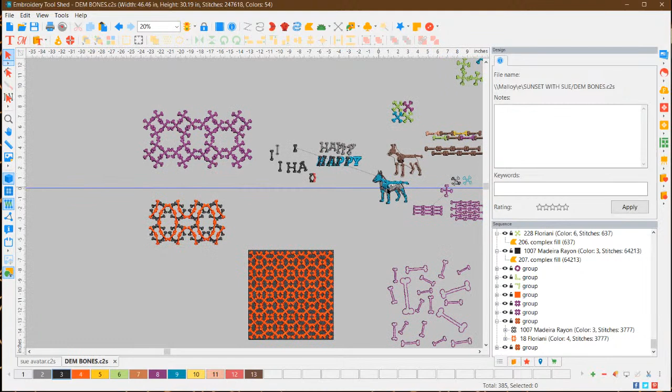It is creative. And just remember when you're doing something like this, it doesn't have to be perfect. Like, I know the rectangles, the dog's spines, aren't rectangles, but who cares, right? You know exactly what it is.

So these last ones that I did, I'm really happy with. I think they are fantastic. And it was just an accidental thing. So it goes to show you guys, try everything. Try everything, try, you know, click on stuff, try it.

Robin with the -25, I was moving on already, I didn't think of it. So this is why we work together, and this is why we do lives, because you can throw ideas like that, and I'm going to try it.

So it's fantastic. Misha, I love those quilt bones. The Argyle one, I will save it out and put it in the group. All of these ones, I'm going to make sure it'll stitch out right. For sure, I made it before the end.

Well, thank you. So guys, play with your bones. I know that sounds really weird, but you should be inspired to come up with your own bone patterns. And different, because of the way I crossed them. Oh, so much fun, this was so much fun.